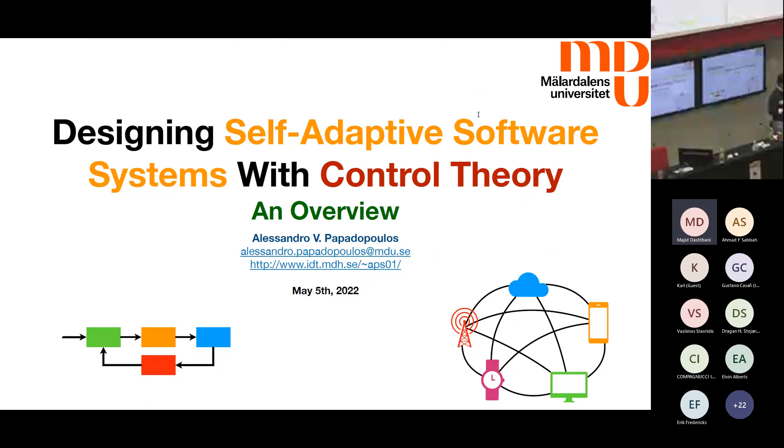So today I want to focus on control theory. That is why it is highlighted there. But I will try to give some motivation right now. We are living nowadays in a very interconnected world, with your smartwatch connected to your smart refrigerator and your mobile phone, and everything is kind of connected to the cloud. And in the middle of the picture, we are also there. We are interacting with this type of systems. We have expectations. We are the ones setting the demand, that is, the workload going into this type of systems. And the number of interconnected devices is growing quite significantly.

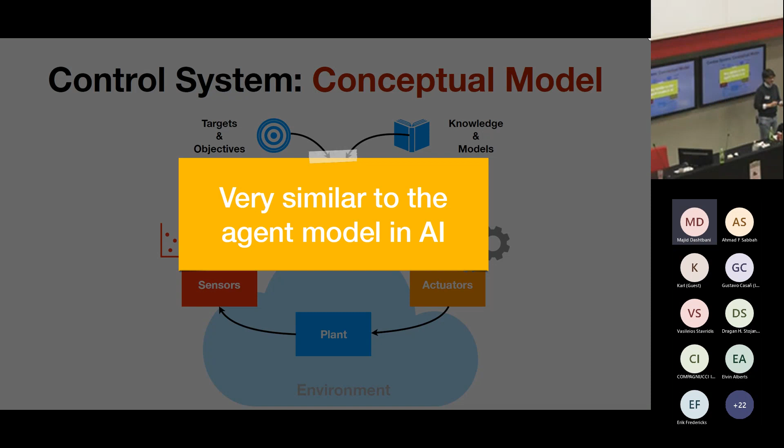Now, curiously enough, this is the classical view of people that are doing, for example, agent-based systems or artificial intelligence and stuff like this. So it looks very similar to an agent in AI. But in practice, if you just rearrange the same blocks in a different way, that's exactly the same view as a control system. And typically in control, we call this a block diagram because there are some blocks that are interconnected, and then you provide some targets and objectives to the intelligence.

The intelligence is embedding some knowledge of the system that I didn't report here, and then somehow you are controlling the behavior through something that is called a feedback loop. And the feedback loop is practically given by this line that is going back from the plant to the intelligence. Okay, so whenever we speak about the feedback loop, we're actually saying there are some sensors measuring some quantities, and we are feeding the intelligence with this information.

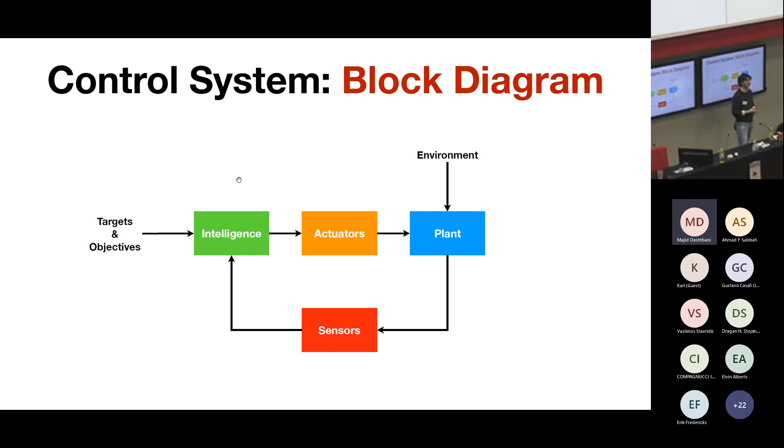Good. So some examples, as I was saying: a temperature controller, you can have the heater or a cooler in a room. Then the environment can be the external temperature or how many people there are in the room. For example, in this room now we're, I don't know, 50, 100 people. And everybody is emitting some heat, right? And then we are heating the room. So if the objective is to heat the room and it's very cold outside, then you're actually helping the control system to heat the room.

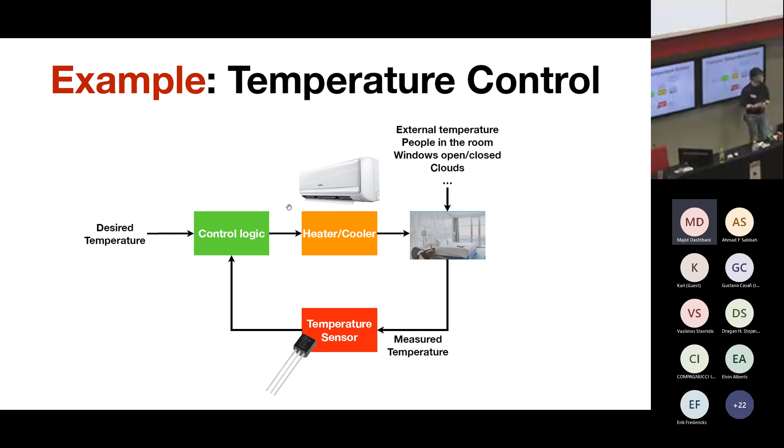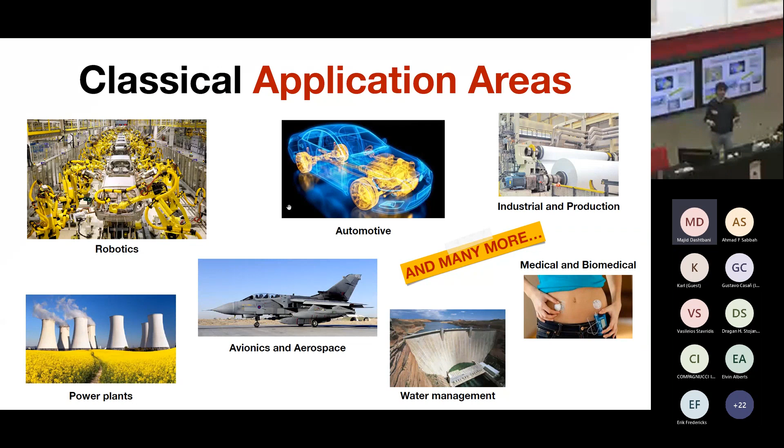So the idea is that this environment is something that is not possible to control. It happens, but then you have to be able to measure what is happening, and then the control logic should decide how to act on the actual heater or actuator. And the same goes if you have a car and several other application domains. So I will not go through all these different application domains that are the classical application domains that you find in a control class. What I'm interested in is, what about computing systems?

But the problem is, what about computing systems? There is no physics, right? There is no Newton's law in computing systems. Not really. So I like to quote this by Linus Torvalds. Computer science has a lot in common with physics, actually, but they are different at the fundamental level. And in practical terms, the big difference is that while in physics you get what you get from nature, in the computer science domain, you are the one designing what you are actually controlling, right?

So you are the designer of the operating system or the software system or whatever. And then he says that within the boundaries of the computer, you are kind of God in a small scale. So it is true, and I want to stress that within the boundaries of the computers, you are God in a small scale. Whenever you start adding communication and other layers and you consider an interconnected system, then it becomes a bit more tricky. But within the boundaries of the computer, you are God. You can create whatever physics you want, right?

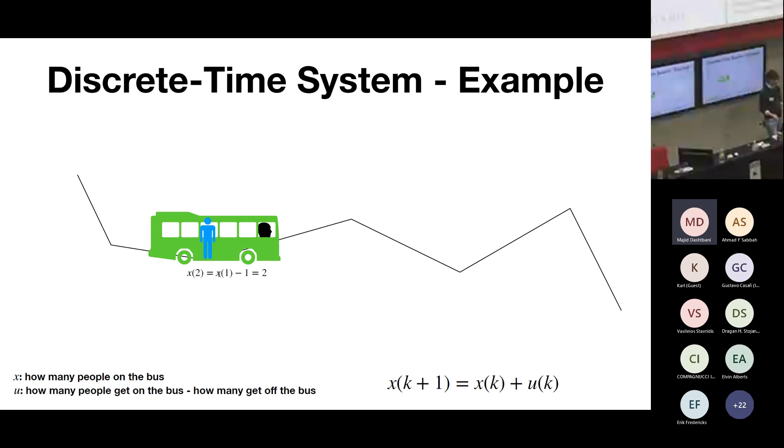And then we go to the next stop, and we have one person that is dropping. So we remove one person from the previous state, x1. So x2 is equal to x1 minus 1. So we have two people, and so on and so forth. So you can play this game until whatever time you want, you can go to infinity. And this type of model is a bit more intuitive than when you have a differential equation. Even creating this model, you don't need, I don't know, a degree in physics. So at the next bus stop, we have the number of people that were there before, plus the number of people that entered, minus the number of people that got off the bus, right?

So nothing complicated. And actually, most of the models in computing systems can be created in this way, because you have always this type of reasoning. Something is accumulating or is not accumulating, and then maybe there is some sort of rate at which something is decreasing. Another notable example: several people don't really think about Google PageRank, the initial algorithm of Google, in terms of control theory or discrete time dynamics. But it's actually quite interesting to look at this from this perspective.

And the fundamental idea behind the Google PageRank algorithm was that the importance or the relevance of a page depends on how many links are going out and how many links are going in the single page, right? So the more connected you are, the better you are, because if several people are connecting to you, then this is going to be quite relevant. So you can model this as a graph.

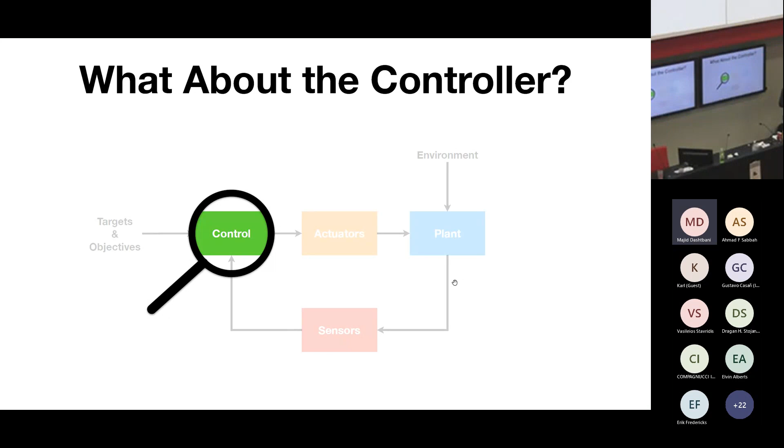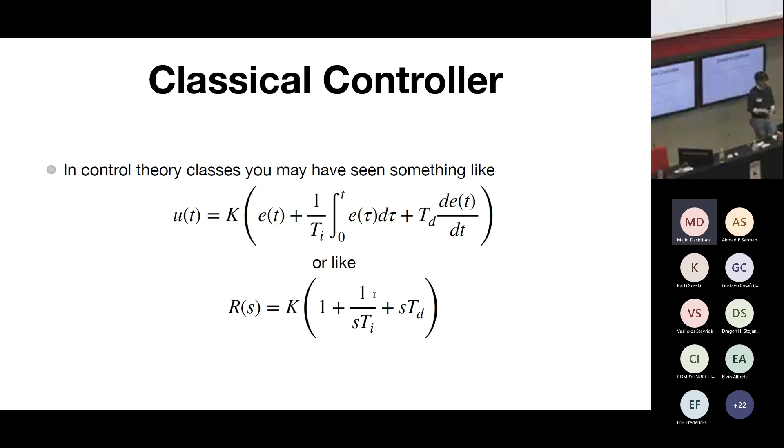So this is a common problem in control courses. So I think it's important to rethink a bit how people are teaching, and I put myself as well in this category, how people are teaching control courses. What is a controller for real? It's something a bit different. It looks more like this.

And then you feed this error, this information, to another function, this compute control law that you want to compute. And then you apply the actuation, and then you wait for the next sample. And I will forget about the continuous time part, because I think it's more interesting to look at the discrete time controller, because it's a bit more intuitive also in terms of algorithm. And then the same algorithm looks more or less like this, which doesn't look much better, but it's more or less how it looks in discrete time, the equivalent of the PID controller in discrete time.

So you compute u of k, that is your control action, your next action that you apply, based on some parameters Kp, Ki, and Kd that are the proportional, integral, and derivative parts. And they are called like that because Kp is multiplying the error. So you take an action that is proportional to the error, how much error you measure between the desired temperature and the actual temperature in the room. But also you have something that is like the integral of the error, that is, you are accumulating the error over time. And also you are computing the derivative, that looks like this. And h is the time in between the two samples.

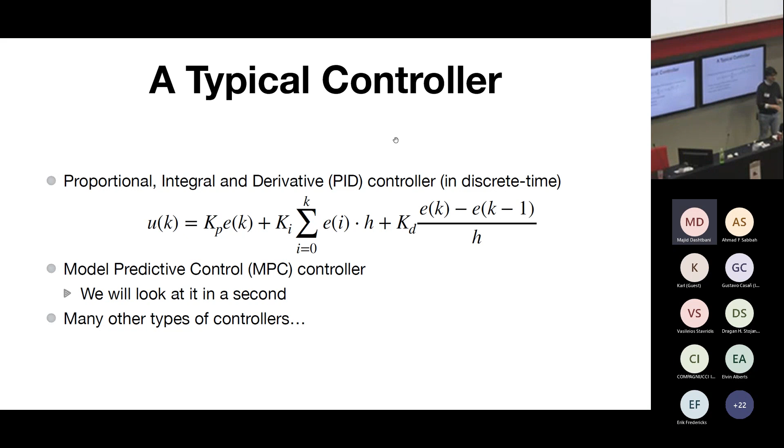So this is a very common controller. And I would say that 90-something% of the controllers out there in the physical world are designed as PID controllers. But we will look also a bit into model predictive control. But there are several other types of controllers. So we will not extensively look at all types of control systems because this will take much more than the time that we have.

Are there any questions so far? Everything crystal clear? Am I speaking too fast or too loud or too, I don't know.

So I want to elaborate a bit, and I promise that this will be the last time you will see a lot of equations. But I want to elaborate a bit on this equation because I want you to remember somehow what I'm doing. So what I have here is actually what I wrote before, the classical view of the PID controller. But then let's rewrite this by just changing the value k. So every time we see k, the time k, we replace it with the previous value. So we write u of k minus 1, e of k minus 1, e of i; we are actually shifting the time index here, and then here in the derivative part.

Now we do another step, which looks super complicated, but what I actually did was take this on top and remove from it the one on the bottom. So it's u of k minus u of k minus 1. So this is what I get here. And then Kp minus Kp, this part, and this, and this. So all of this simplifies to a fairly simple expression. So let's forget about the D part for a second. What I'm writing here is u of k, the action that I'm taking now, is equal to the action that I took before, plus some correction. And this correction is proportional to the difference between the previous error and the current error here, and then some other function.

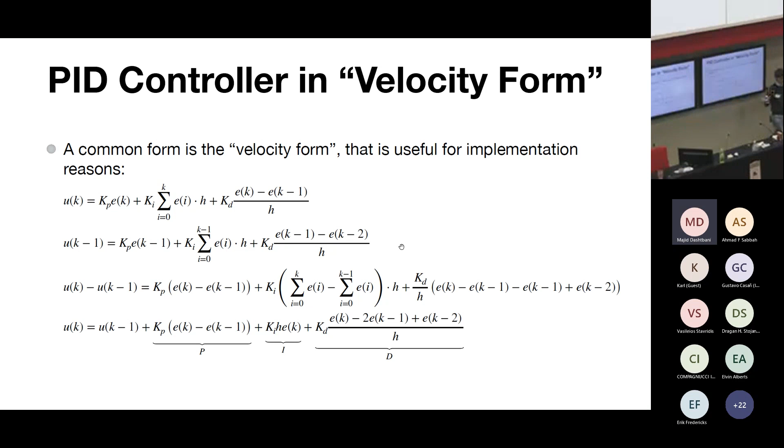So now this is the basis of most of the controllers that one can design and that can solve a lot of very important problems. Of course, if you set Kp or Ki or Kd equal to 0, not all of them, but some of them, then you get, for example, the proportional controller, integral controller, derivative controller, and any combination thereof.

And then you save for the next iteration the state or what you need from the previous value, like eprev is the previous value for the error, and then you save it, and then you return the current value of u, and then you will reiterate continuously this. So it's fairly simple.

And if you have ever tried to implement maybe a neural network or a reinforcement learning algorithm, it's not that simple. And it's not that simple, but it's also not that predictable, the type of behavior that you get in terms of execution time, in terms of energy that you're consuming, in terms of many other factors.

So this function is really just these few lines, and then the whole course of control theory that you have studied is just trying to tell you what is Kp, what is Ki, and what is Kd in a sensible way. How do you choose these values? And that's it. So if you think about a neural network, it is the same as tuning the weights or tuning some hyperparameters of a reinforcement learning algorithm. But the function is extremely simple.

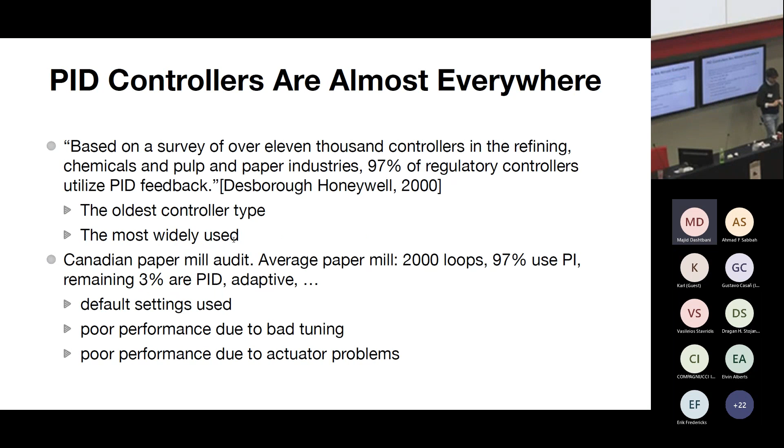And I will skip some other parts. I will not go into several details, especially because I don't have... Yes? Do you want a microphone or?

As a computer scientist, yes. What about generalizing this so that the return here is not just a double? How can I generalize this? Because in general, when you control a computer system, you don't control it just with a double. It might be something more involved. Yes.

Yeah, that's a very good question. So it's one of the fundamental, I would say, not limitations, but one of the things that one has to think about: what are these numbers? What is the error and what is u? It can be a generic action. It can be a number that is controlling some thresholds or whatever.

So the choice of what is the actuation and what is the sensor in a computing system is critical for making this functional. Of course, everything that is control related works with numbers. So you have to translate at the end of the day the action that you are taking into a number. So you cannot just put a structure there and then say, okay, I'm multiplying a structure by 5. What does this mean? If you are able to define this, then yes, you can do that. But it's a design problem.

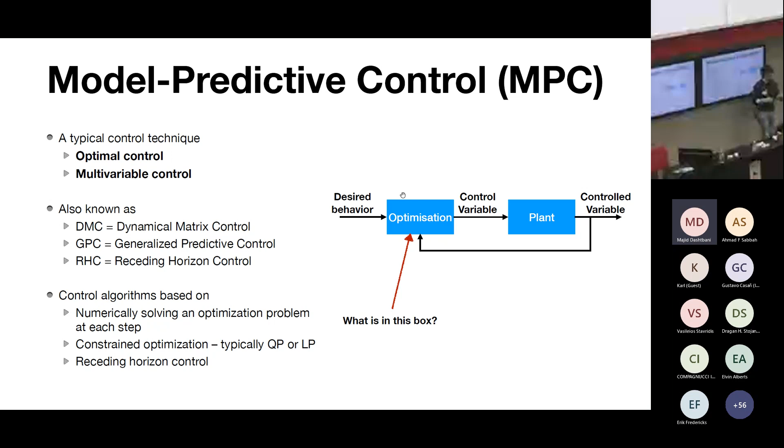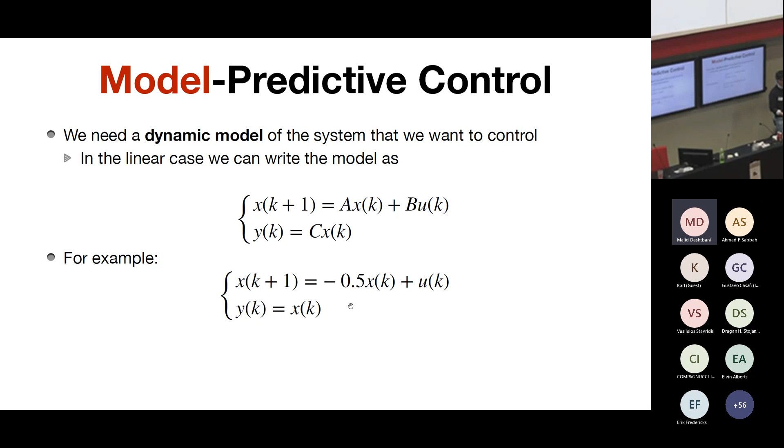And the idea of model predictive control is that you should have a model, and the model is exactly the same as the model I was showing before. Typically it's written in this form, as I showed before. For example, it can look like x(k+1) = -0.5 x(k) + u, and y = x. As simple as that. But then there is a predictive part.

And what does prediction mean? How do you predict the future? Well, if you have a model, you can use the model to understand how your actions are going to affect the future, okay? And the idea is that you unroll the model dynamics. What does it mean? It means that at time 0, you write this one.

And then what you get is that no matter what the time instant is, the value of the state and of the output of your system depends on the initial state, according to some function of A, and u(0), u(1), u(2), that are all the actions that you are going to take, right? And you don't know these actions. So what you want to do is to find this plan of actions in a way that you are optimizing a certain behavior, okay?

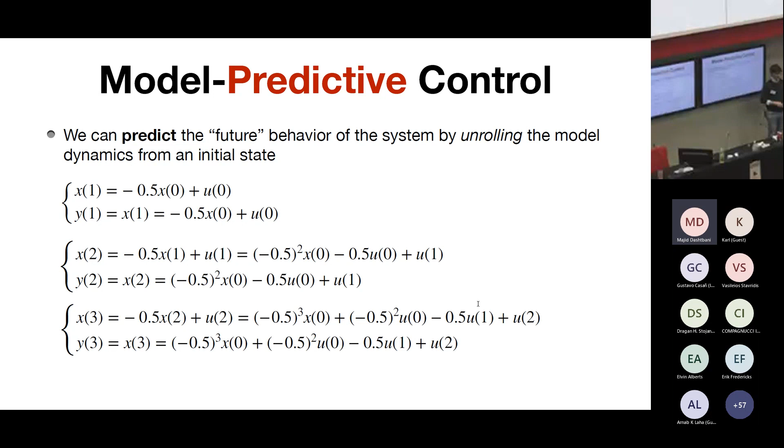And then, for example, with a numerical example, you get this system here, and then this is going to be like this, and you can plug the numbers, and then you get all this in this form, right? So the fundamental idea is that you can use this to predict the future as a function of what your actions are. And you want to find the best actions you can so that you are minimizing a certain function.

And u is another component that is added to this cost, that, at the end of the day, is related to how much energy you want to dedicate to control the plant, okay? The other thing is that you don't have full control of how you are controlling your plant. Sometimes you have some limits, like for example, a heater cannot go more than 100% of its own capacity, or you cannot turn it off more than off, right? So you have some limitations on how you can actuate. And sometimes these limitations are not only in terms of minimum and maximum, they can be even in terms of how fast or how much you can change at every time iteration.

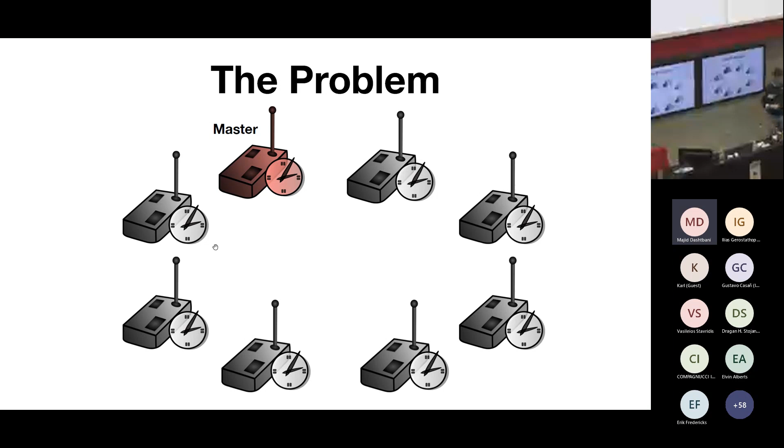But the problem at the end of the day is that you have a set of nodes, wireless sensor nodes, and you have a clock in every node. And we are focusing on a master-slave architecture. So there is a master node that is the one telling the truth, even though its time might be wrong, and all the others are the slaves. And you want the time of all the slaves to be exactly the same as the time of the master. So all of them should have the same time.

The problem is that every single node, I mean, you can synchronize them at a specific time, but then every single node will experience a deviation. So my clock will always deviate a bit from your clock and from someone else's clock, okay? And the reason for that is that sometimes there is an offset, maybe a very minor offset, and then the error in milliseconds can be just a constant error, and that's not really a big problem. It can be compensated easily.

But it can also be that there is a minor skew in how time evolves. What does it mean? It means that, for example, I have a quartz in my clock, and it is oscillating a bit less frequently than the quartz in another person's clock. And then over time, this difference will deviate quite a lot. You may have some drift due to several different reasons, and then you have also some jitter that makes the error even more unpredictable. So all in all, if you just synchronize two clocks and then let them run, you will always have some error due to these reasons mostly.

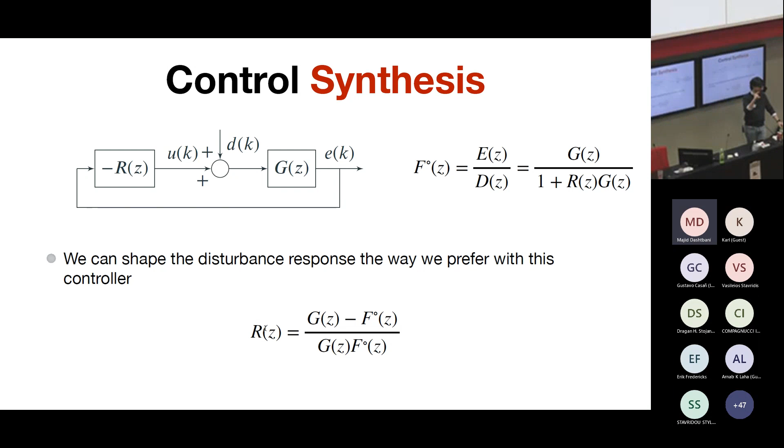So I will go very fast on the control synthesis, because here we didn't use a PID controller, or we didn't use an MPC. We used a kind of custom-made controller, and everything boils down to a function that looks very similar to the PID controller. So you can implement it as a few lines of code, but the way it is designed is a bit different. The way it is designed is based on the disturbance characterization. So you know that there is a disturbance happening, and you can model the disturbance somehow.

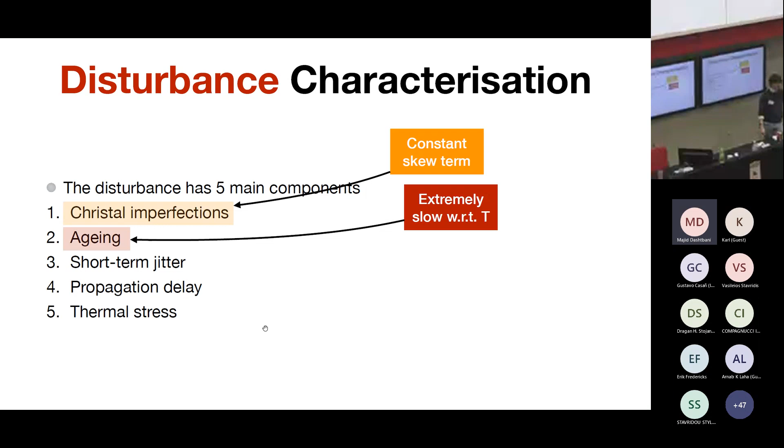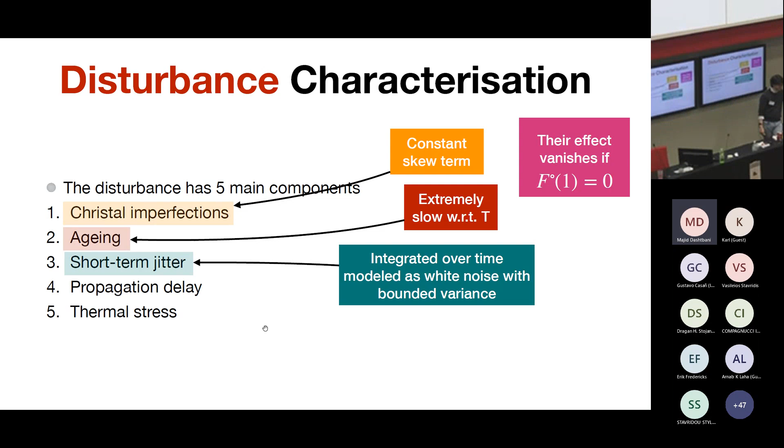So the disturbance can come from crystal imperfections. That means this is going to affect the skew term, the aging of the device. While aging is happening, you can have a deviation in general of the clocks, but this typically is very slow with respect to the synchronization period T, and their effect vanishes if you select something in the design. There is a short-term jitter that is typically a very small contribution, so it's not affecting the design so much, and in principle you can take this into account in the design of the controller. There's a propagation delay that is typically negligible, but in some applications it can be a bit more sensitive. And we actually dealt with the propagation delay.

And the other part is the thermal stress. The thermal stress is a bit more interesting, because it is something that several algorithms for wireless sensor networks are dealing with in an explicit way. They try to put in the node some additional sensors to measure the temperature within the sensor, because temperature is going to affect quite significantly how fast your time goes according to your clock. You can think about this as boxes. The wireless nodes are typically within boxes that, if deployed in an outdoor application, the temperature can make very, very warm or very cold, depending on the weather. So in principle, I will not look into these equations. Don't worry about that.

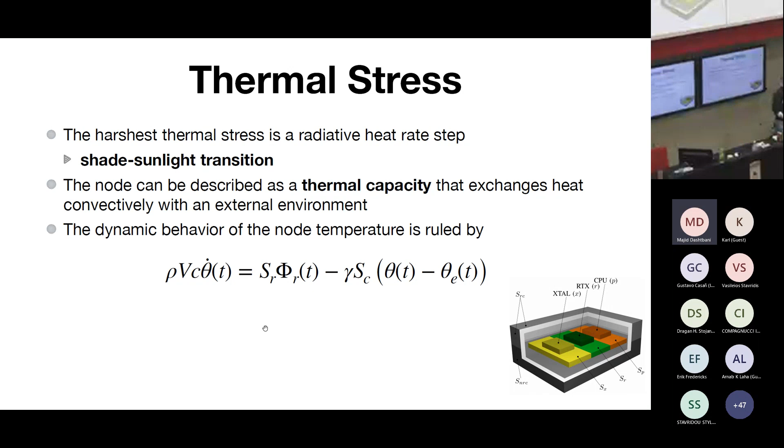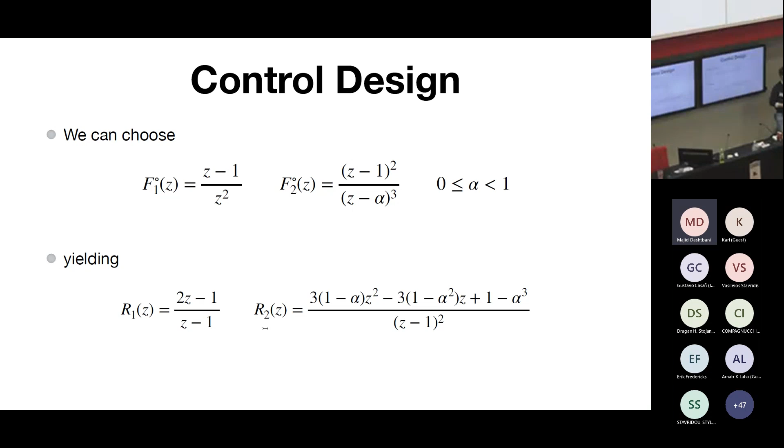But what I wanted to say is that you can design the controller in a way that you are accounting for all these disturbances. And you can even tune these parameters; we developed a tiny tool to choose these parameters in a proper way based on your requirements.

But typically what happens is that whenever you have a step in the thermal stress, meaning that you have your node deployed outdoor, there is typically a sun to shade transition. So there is a cloud passing in front of the sun, and all of a sudden there is no radiation going to the box. So you are not heating it, the temperature goes down, and then the cloud vanishes, and there is another gradient of temperature on the box, and this is affecting quite significantly the temperature and the time synchronization.

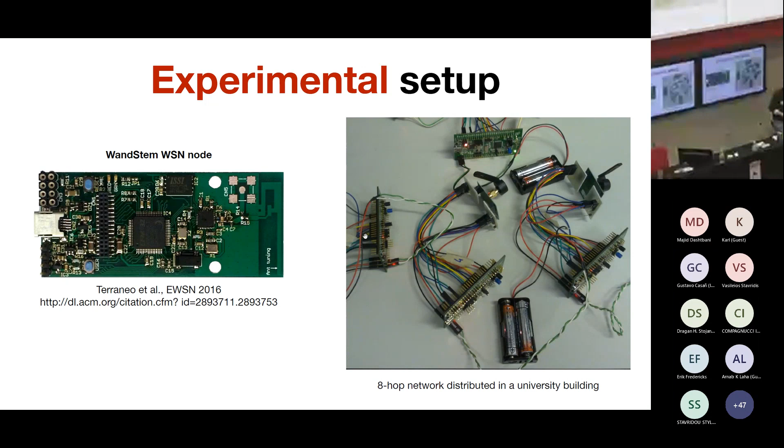So all in all, we did some experimental setup. We were actually emulating even the sun to shade transition and vice versa. And what we obtained in a multi-hop network was quite nice and impressive. We managed to get the synchronization error down to below 1 microsecond. And typically, the error is on average in the scale of a few tens of nanoseconds.

What I'm showing here is the shade sun transition. The black line is more or less how the synchronization error is happening, and you see that it's smoother in the way it reaches zero, while these other two algorithms are making very abrupt corrections. They ramp up, and then you make a correction because you are overwriting your clock, and then you ramp up, and you correct, and so on. So they follow similar patterns, but the black line is actually guaranteeing a continuous correction.

So if this is the time, you are kind of oscillating around the time, but you're not going back in time. So it's never going this way.

And we did also something related to delay compensation, but I will not speak too much about this. In an outdoor application it's not very important because typically you deploy the nodes not so far away, and the propagation delay is quite small. But if you are underwater, for example, the propagation delay is increased, and in underwater applications the delay compensation is going to be important. And for delay compensation, we have to use some messages in the synchronization. Some other things, but I will not speak about this.

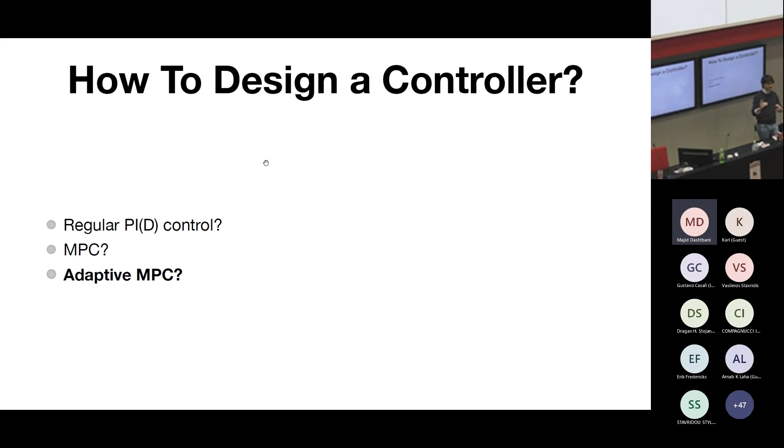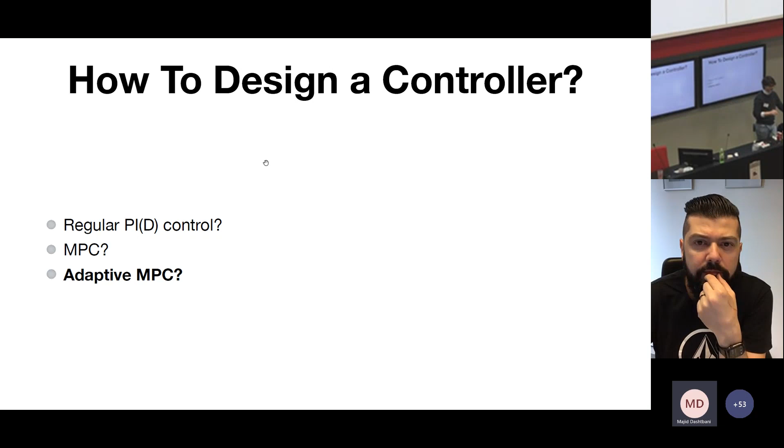there is also a terminology clash between the control literature and the software engineering literature, because you have heard about self-adaptation, and then you have heard about adaptive software and so on. But what people in control mean when they speak about adaptive control is slightly different, that is more related to the learning part. So it's about learning something at runtime. So adaptively changing the control strategy.

So the idea is to add to the classical MPC that I showed before another layer, another block that is an online identification. That's what the control people used to call it. It's an online identification algorithm that is nothing else but a learning algorithm. You are learning the model of your system. You want to learn the matrices A, B, C in your MPC model so that when you use it for predicting the future, your model is always more updated, more accurate.

And the reason why we wanted to look into this is that applications are not as nice as, for example, task scheduling or clock synchronization. Applications are actually a bit more nasty because they may change abruptly the type of behavior when you are allocating more CPU or more memory, because they can be for a certain amount of time memory bounded, so they are eager to get more memory, and if you don't, they will not speed up, they will not increase their heartbeat. But sometimes all of a sudden they can change and then they can become CPU bounded, meaning that if you give more cores, they will get better in terms of performance.

So we want to learn when this is happening and then somehow switch the strategy or continuously change the strategy based on the actual performance that we are experiencing. And the idea is that this model that we learn online at runtime, we can use for making better predictions. Okay. I will not dig too much into the details because, with the MPC I have presented, if you know anything about machine learning and related stuff, you understand also what can be in that block, more or less.

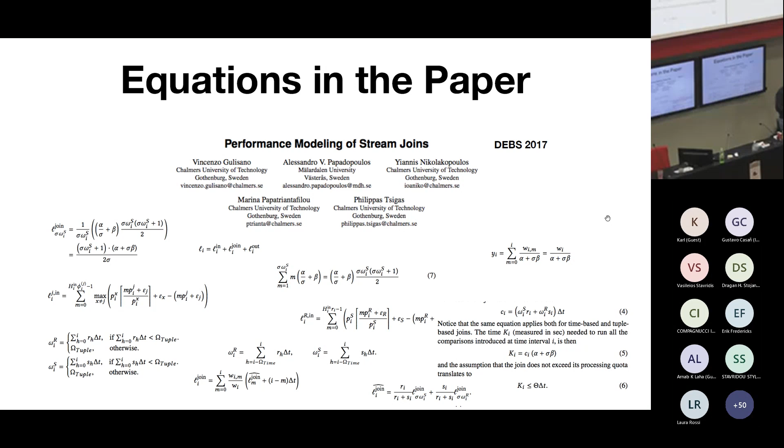But sorry for this detour. We take this offline, and I'm very glad that somebody picked it up.

So maybe the last thing that I also want to mention is that one of the advantages that one can have with this sort of modeling that is kind of in a closed form is that you can start analyzing the behavior of your system from a different perspective and try to get some fundamental results that you wouldn't get if you were not modeling with mathematical models. For example, this is something that we found out by just using the model.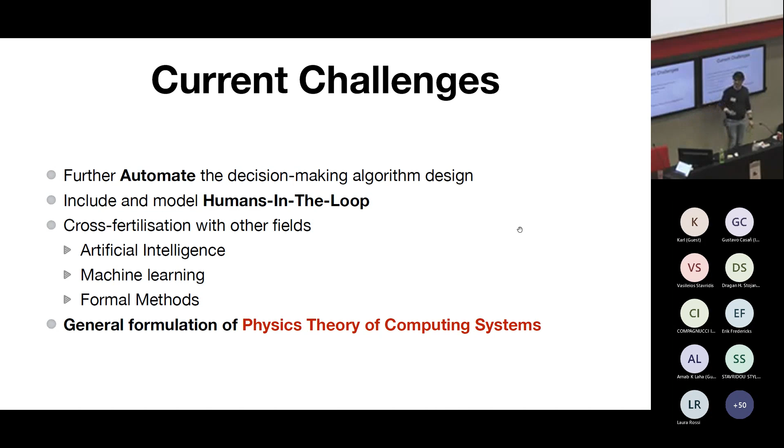But then, of course, if you ask me what is my dream, it would be to find sort of a general formulation of physics. We don't have in computing systems like Newton's law, as I said before, or conservation laws. But it would be nice to have this type of things. If I ever win a Nobel Prize, it would probably be if I manage to do something like this, which is extremely challenging. It's maybe impossible, I don't know, but that's why we are here to do research, to take impossible challenges. And with this, maybe we are going towards a more shared discipline, combining more mathematical-oriented approaches like control and development of software. Maybe that's something.

But all this, of course, was done with tons of other people. It was not only my work. I don't take credit for all this work. I've been collaborating with several people, and I have learned a lot from these people. So it's definitely important to acknowledge this, and I strongly advocate for talking with people and learning from other people, because that's the way we progress.